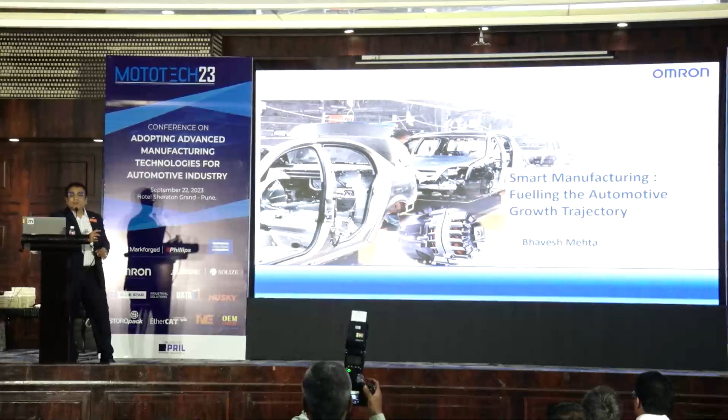That's where, when we say here, I think the previous speakers have spoken about the environment, the requirement, and also the skill set availability. Now what we need is a platform embedded in between, and that's where Omron comes in. Omron basically stands for the synonym of automation world. The previous speakers were talking about advancement, technology, innovation, intelligence, digital transformation, and a lot of other things, and I think it is all boiling down to the automation need.

So the presentation from me this morning would be based on the automation insights for the automotive industries. I'll quickly go through what Omron Corporation is and our principles, our presence in India, what solutions we offer in automation, and then of course the smart solutions we are trying to pitch.

So basically, you all have come across many innovative things. Omron, we are a very humble organization, headquartered in Japan. We are a Japanese company. But just for your information, the world's first automatic traffic signaling system is by Omron.

The world's first ATM machine is by Omron. The world's first solid-state relay is by Omron. The world's first PLC, the fuzzy logic controller, is by Omron. And the list is endless - even the LCD calculator screen is by Omron. So we are an innovative company from the birth of the organization itself.

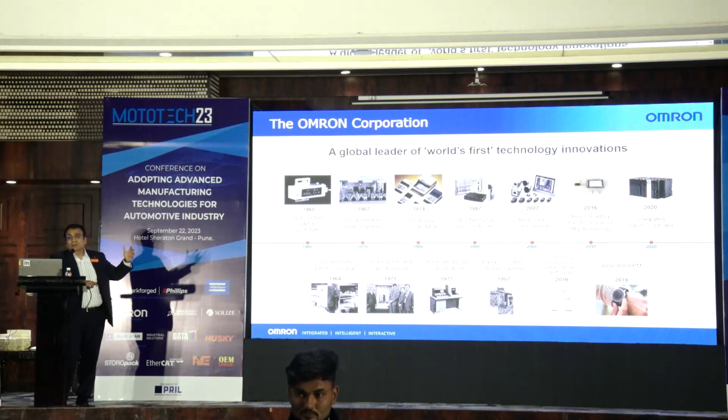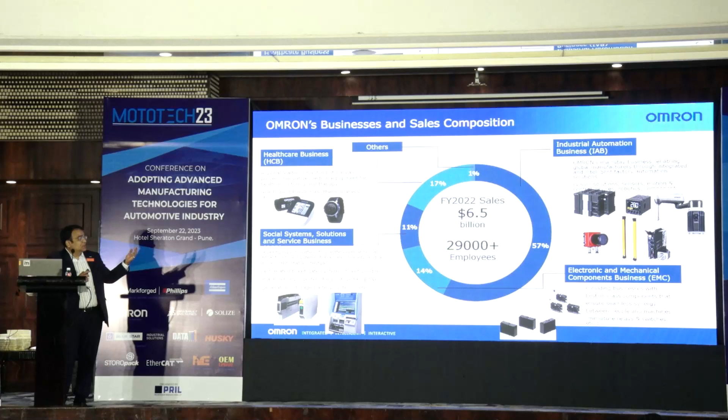We are about a $6.5 billion US organization, headquartered in Japan. And the major piece, if you can see, it's about 71%, 57 and 14 is from the automation piece. And of course we also have healthcare - many of you might be using Omron BP monitors and ECG machines at home. But what I want to say is we are as large as any big organization you name in the automation world. If you map the serviceable or addressable market, we are rather the largest in terms of the automation piece that we are supposed to offer, which is almost $4 billion globally.

Our values and principles - our previous speakers were talking about the greener tomorrow. Basically, it's improving the life of people, which is our mission. Our value is innovation driven by social needs. 6.5% of our revenue goes into R&D, which keeps us on a cutting edge. We challenge ourselves - that's what the principle speaks about. Every individual is challenged by its own KPIs. And also respect for all - that's what we call act with integrity.

In India, I think this is very important - we are spread across the length and breadth of the country. So when I have to speak about the automation piece or the solution, it is also about the skill set, which the previous speaker just spoke about. We are almost 27 years plus in India, with 200 plus strong workforce in India. We have a big warehouse which houses about 37,000 SKUs in the automation piece, which is by far the largest or the biggest portfolio.

We are from relay to robotics - anything and everything in automation we can serve with. We keep always a very healthy stock of about 1.5 months inventory of orders. We have a POC, proof of concept lab in Pune, which is just a stone's throw away from you. We have 2 repair centers, so we also do some component level repairs. And we have 3 training centers. So all the customer needs - our end users, to OEMs, to machine manufacturers, to part manufacturers - we can cater to.

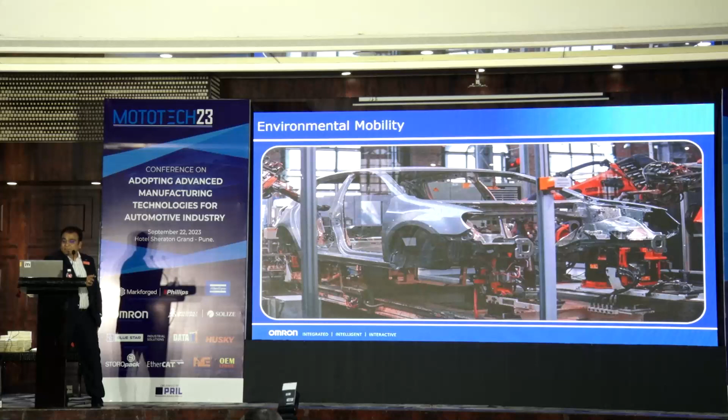Today we'll discuss environmental mobility, and this is how I started with Henry Ford's example. When I look at Omron's offering, we cut across every application - from quality inspection to line traceability, data serialization, up to proactive safety.

I think my previous speaker was also emphasizing safety, right, in Indian parlance. So anything and everything that goes into the manufacturing world, especially in the automotive industry, is taken care of by us, including robotics, control and automation.

As I said, we have 37,000 SKUs live and up and running in India, so we can cater to any wide range or any spectrum of requirements that you have.

Plus, we are a Japanese company, and we are blessed with presence in the Automotive Industries Association in Japan with Suzuki, Nissan, Toyota, Honda. And in Korea, we are also very largely present with Hyundai and Kia Motors.

So in Indian parlance, if I have to sum up those 6 companies - and now we have started to work very aggressively with Tata Motors and Mahindra - we are kind of omnipresent with about 80-85% of the automobile manufacturers in India.

What we are distinct in, as I said, the black color of the Ford is the 'i-Automation' for Omron. So when I speak about integrated, we have solutions which are very widespread but seamlessly integrated - it's kind of plug it and forget it.

We also can work very seamlessly vendor agnostic. If you have any other automation platform, any other sensors, or any other IoT devices, our systems can very well get integrated with those systems, and then you can have a seamless automation platform.

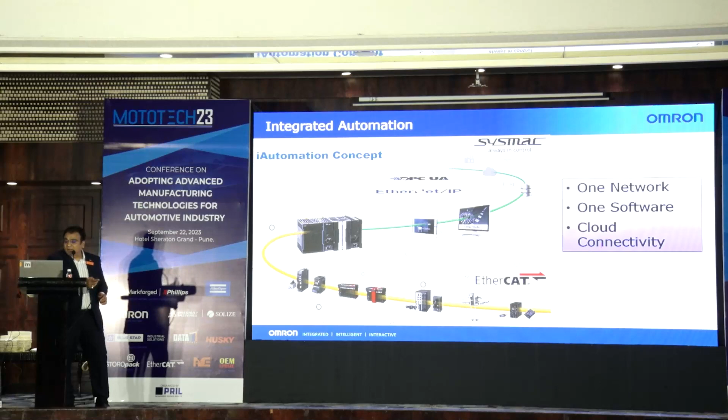So we offer very seamless, single mode architecture - single network, one software, easy to configure, easy to maintain - and it really helps unskilled and semi-skilled oriented customers as well. And of course, we can give you cloud connectivity.

Of course, I will not use the word duplicate, but likewise, right? So basically what we are into is also the MVRC and DPM solutions. The part manufacturers will understand, and as we go along, I'll explain. But basically, it goes right from the manufacturing stage, the quality inspection of the smallest component to the finished product and the major equipment. Everything gets traced.

And then we have various dashboards, and these dashboards can be hosted on the cloud, or it can go up to the MIS reporting. So this is all flexible manufacturing and smart manufacturing available from Omron, single platform.

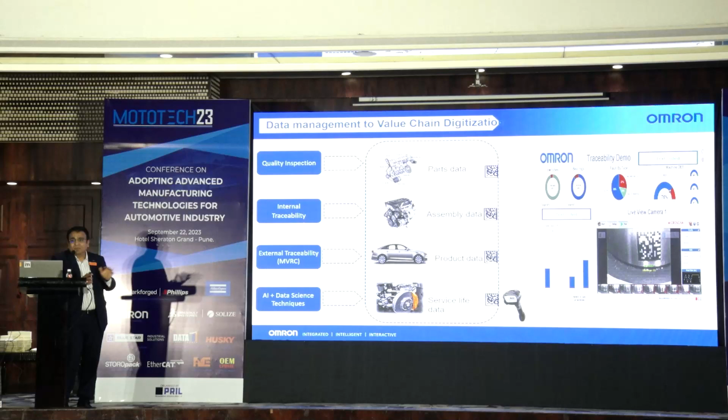Now this is what I was calling MVRC, which is marking, verifying, reading and control. And DPM is direct part marking. So on the parts, you basically directly mark and then it gets embedded onto the part itself. So this is a solution which is very unique and it has something to do with traceability. With Omron's set of solutions, nothing can be duplicated, you get a very good, high amount of traceability available.

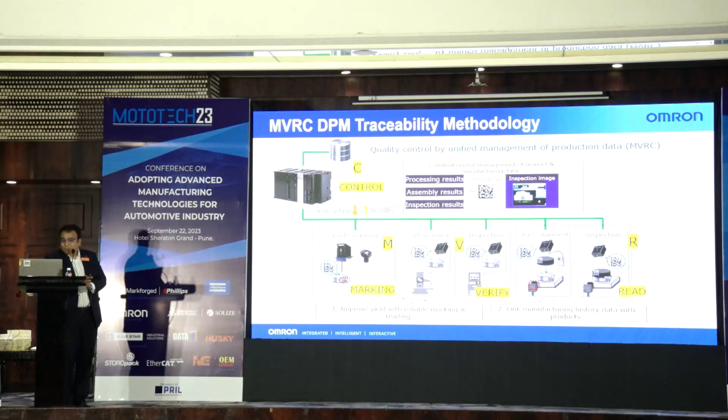Whereas what we have is an AMR, autonomous mobile robot. You just leave it here, and it will ensure it doesn't collide with any of you, even if you start to move in the room. So it has 360-degree sensors and everything, and the range starts from 60 kilos to 1,500 kilos, or 1.5 tons. So this is the load-bearing capacity or payload it can carry, which is very ideal if somebody has any metallic part to be moved.

And we have a fleet management software, which is again unique to Omron. It is patented technology. 100 such mobile robots, you just leave them alone, and they will find their path, they will not collide, and you can program it easily. For example, if something is near robot 1, and maybe robot 2 is there and robot 5 is somewhere else, once it starts to move, it auto-assigns the activity to other robots, that robot 7 has to go to Bhavesh because it is in the nearest proximity.

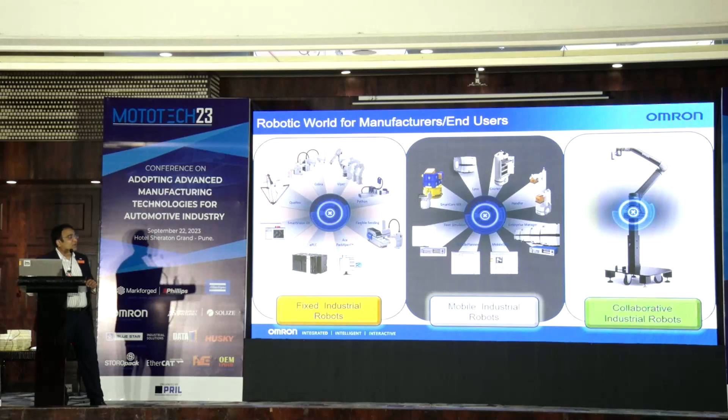And of course, we have various fixed robots and also cobots. Now just for the benefit of you all, I'll give one small example. In 54 seconds, 32 times images are taken, and on the right-hand side, you can see there is a go, no-go. Okay, it's an engine inspection.

We cannot tell you the customer name, but their efficiency went up multifold. In 54 seconds, 32 images, and it tells you where even a small rivet or screw is missing, or there is a loose connection, or a connector missing, or paint which is not done properly, if there is no QR code, no chassis number, not the full chassis number — anything and everything gets traced. This is also vertically mounted, so it's a specialized mounting, but you can mount it anyway, sideways or normal mounting. It is inverted, and then there is a vision camera.

Only Omron robots also have the capability to mount a vision camera on them. Mr. Deshmukh was speaking about the vision and AI along with cobots or robots. So we have an integrated solution, and the beauty is this can also be very well mounted on a mobile robot, which becomes a MOMA, mobile manipulator.

So it's a mobile robot which can go anywhere and everywhere, self-teaches itself, and has a cobot which can do pick and place or vision or a mix of this. So it's a high amount of permutation and combination that you can teach in your plant, and it is up and running.

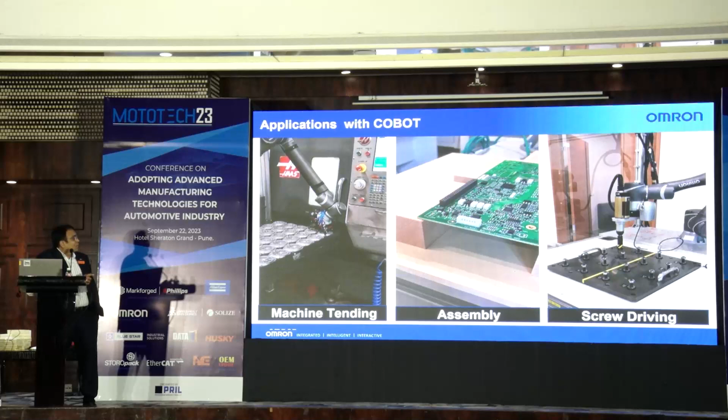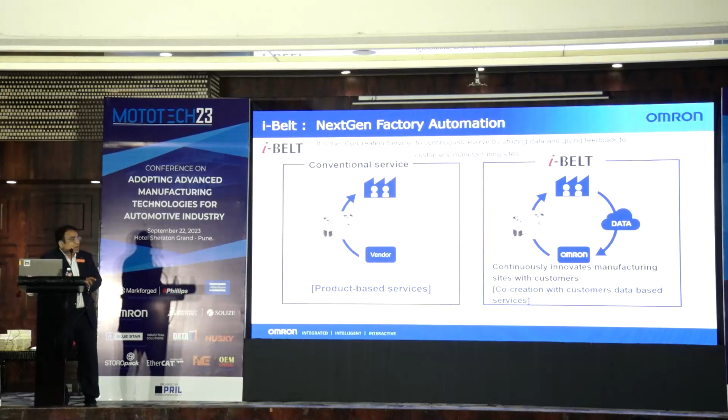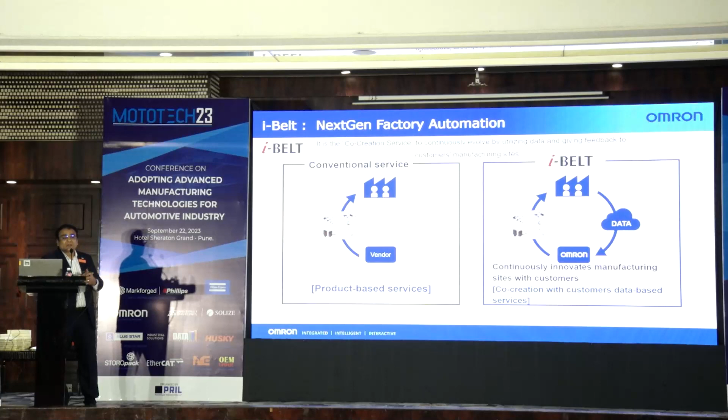iBelt is one more solution. Again, when I say 'i', it's for integrated, intelligent and interactive. Basically, beyond the usual way of working with a vendor of automation, we also work in a closed loop manner, wherein the data comes very handy and we work collaboratively to improve your manufacturing processes. This is something unique in iBelt services, where the data generated by the automation devices and the dashboards help you improve your manufacturing practices, the best manufacturing practices.

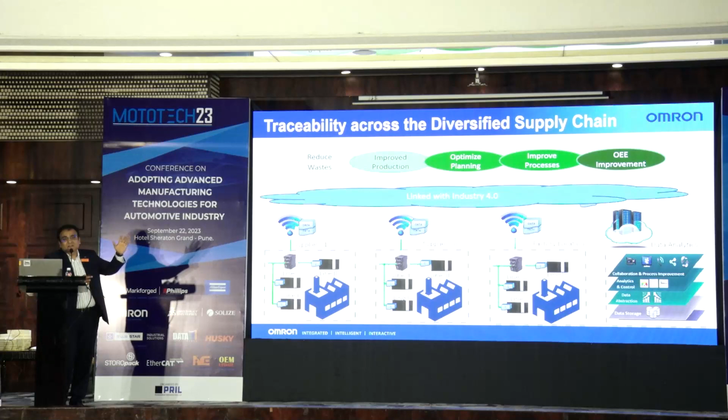I'll skip this because it's something to do with the cloud. What we want to say is, if you are a multi-plant, multi-location based organization, we can still come and help you by collaborating the data from every plant and get the best practices of, let's say, plant 1, and we can embed them into plant 3, for example. So basically, it is for your OEE improvement.

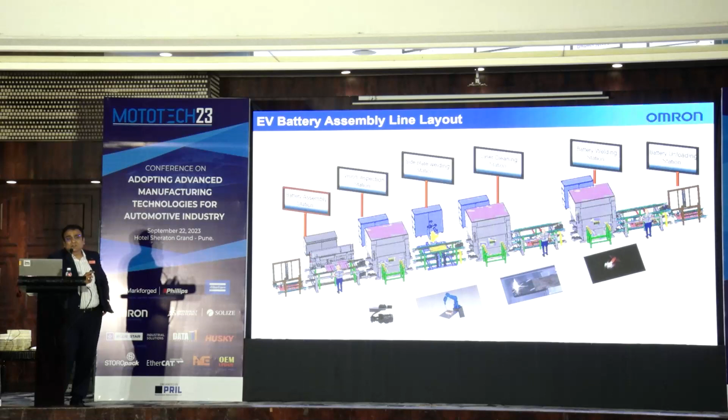As far as we were talking about EV, ma'am, sorry, I'll just take a couple of minutes more. EV manufacturing, we do anything and everything, as you can see, and I'll not go much in detail in the interest of time. But as you can see, there is a live video of laser cleaning, and also there is welding. So all the solutions, control, automation, precision, which we can provide. This is one of the beautiful features, patented by Omron, called flying trigger technology.

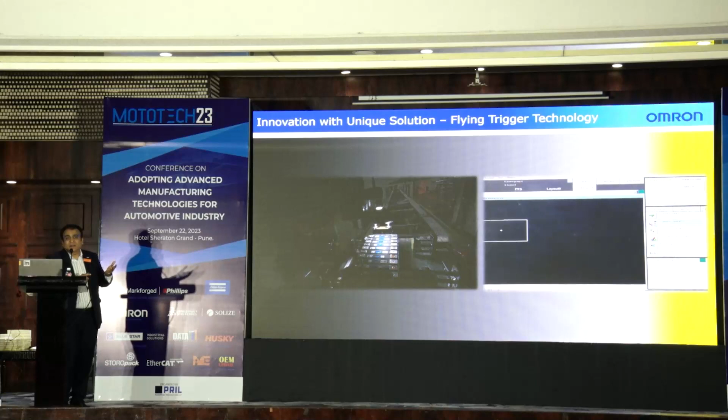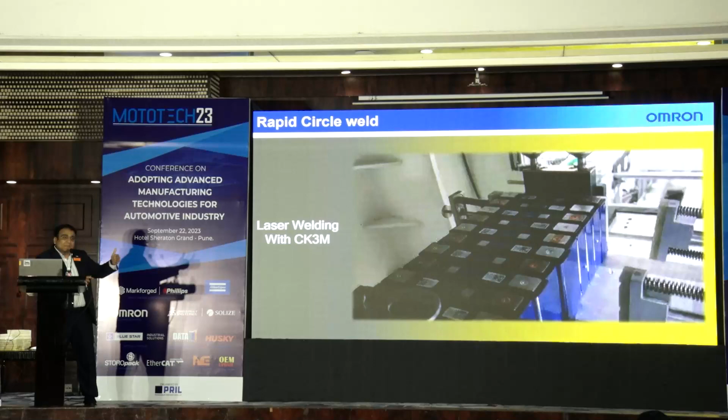This increases your inspection speed 3 times, 2.8 times to be precise. As you can see, while moving, it takes images, it doesn't have to move at every battery bank or every inspection point. Many of our peers - it's generally bad manners to talk about peers, but I have to tell you here - many of our peers, if there is a bank, it stops at every inspection point. Whereas this is a smooth movement, and it still captures all the inspection points and gives you the results. This is the last video, which is about laser welding.

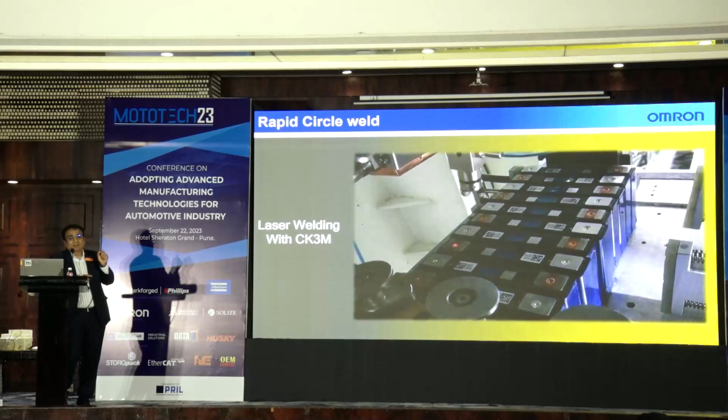So this is again EV, and there is a battery bank. As you can see, the red dot which is moving is as precise as a 2 millimeter circle, with 0.2 millimeter or less than 0.2 millimeter accuracy. In EV vehicles, the battery and this kind of welding, precision is utmost important, and that's where we come very handy. So we are offering very accurate kinds of solutions.

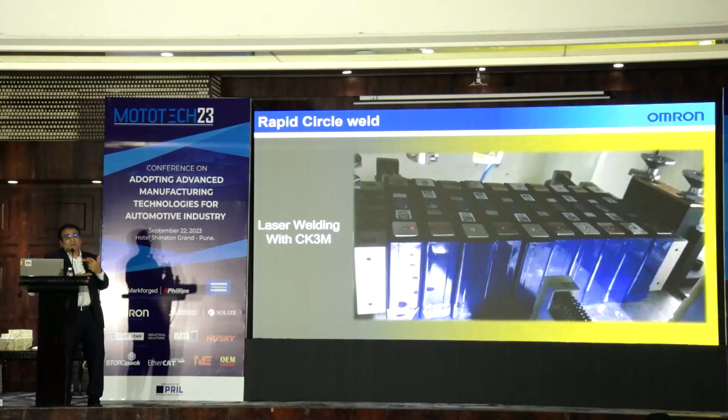Just to conclude, again, from relay to robotics, anything and everything that you can imagine, or from sensor to boardroom as we say, you can have it from the range of Omron spectrum, and it is all coordinated control. So with this, I end my presentation, and thank you so much.